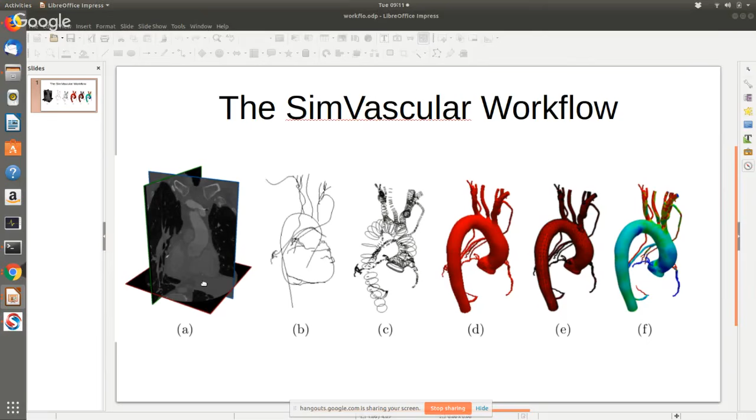And then once you have this mesh, you can then run the simulations within SimVascular, and then you can analyze the results and get any output data that you want from the simulation. All right, so generally speaking, whenever you use SimVascular, it's going to be this process, right? The blood vessel center lines, to the 2D segmentation step to create the surface, to the 3D model, to the mesh, to the simulation. All right. Okay, so just remember that when we go through SimVascular.

Okay. So here's the SimVascular software. This is the main screen you'll see when you first launch SimVascular. It's sort of the home screen. And it doesn't show anything yet because we still need to load in data, right? And so the way that works is we click File, we create a project to organize our data. And so we'll just call this webinar demo, right?

Okay. And so once we've created the new project, you'll see that the left menu populates with a number of categories. And this is the area where all the data that you create and all the files that you create while working with SimVascular will be organized so that you can go through and inspect them when you need to. Okay, so as I mentioned, the first step with any SimVascular project is, of course, we want to load in the patient's image data so that we can see what we're working with.

And so the way that works is we go to the SimVascular Data Manager menu, we right-click on Images, and we choose Add or Replace an Image. And then it will open up a file browser, so you can browse to the area where you have your image. So I'll do that here. So here I have the sample data that we have on the SimVascular website. You can choose whether you actually want to copy the file. Sometimes images are large, so you may not want to copy it, but sometimes you want to keep it organized and copy it into the project.

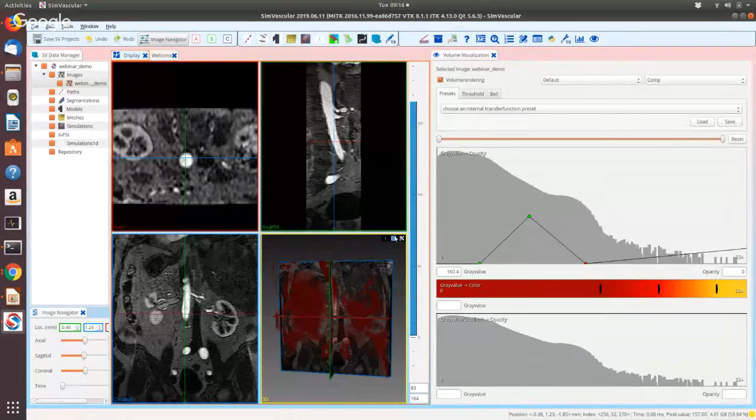Right. And so using this we can see more of what the 3D structure is, and of course we can refine this to get a better idea, right? So see, refining it a bit, we get a better idea. And if we click here, we can turn off the panels, so we can really see, actually in 3D, what does it look like? So here we get a pretty good view of the blood vessels and the kidneys, and we can see what those look like.

All right, so the volume rendering is a bit compute intensive, so I'm going to turn that off as we continue. Turn the crosshair back on, and go back to the 4-panel view. Great. So as I mentioned at the first part, the next step we want to do to make the cardiovascular or the patient-specific model is to start constructing the vessel path lines. All right. So to do that, we move to the left here to the data manager. We right-click on paths, and we choose Create Path.

You can give the path a name, and so usually you would name it for the vessel that you want to do. So in this case, we're going to first construct the aorta, so I'll call it aorta, and click OK. And now we'll see that that path has been populated in the data manager. So if you double-click on it, the path planning menu opens up, and there's nothing there yet because now we need to start adding path points. And so the way to add path points is to navigate to the image views and to control-click the areas that you want to add a path point.

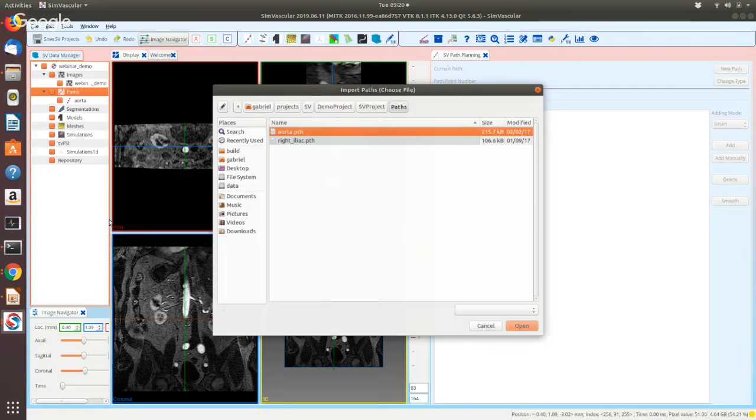But in the interest of time, I'm just going to import some pre-made paths that I have already so that we can go to the next step, which is the segmentation step. So I'll just import the paths. Okay, so as you can see, I imported the paths, and now they are populated in the render window.

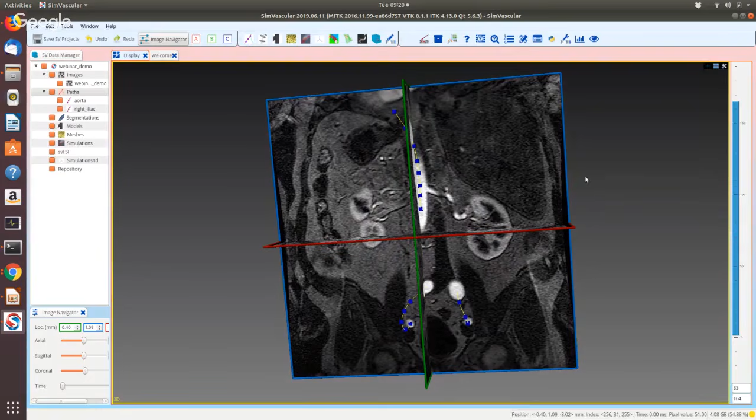Okay, great. So once you have the paths, the next step is to construct the vessel surface. And so the way that works is that we create a segmentation group. To do that, we right-click on segmentations, we choose create contour group, we give it a group name. As I mentioned, every contour group corresponds to a specific vessel path. And so you have to select which one you want to segment.

So here we'll do the aorta. And if you leave the name blank, it will just give it the same name as the path, which is fine in this case. So we get a segmentation now that says aorta. Great. So we can double click on the aorta to open up the segmentation menu.

And as you'll notice, now the view has changed because now we have entered into the segmentation view, which is something that was specifically built for SimVascular to make this process easier for people doing these segmentations. So essentially what you see in this view is we have a planar view of the cross-section of the vessel corresponding to a plane that's perpendicular to the current vessel path line, right? Because this really lets us see what is the cross-section of the blood vessel at this particular path point. And so this is what's shown here.

So you can really see the surface of the blood vessel and what its shape is. And then in this view, we have a gradient image to additionally help you identify where the boundaries of the vessel are, because those are usually high gradient sections. So in the segmentation menu, you can drag this slider to slide across the vessel, right? And doing this, you can see how the vessel evolves as you move down the path line.

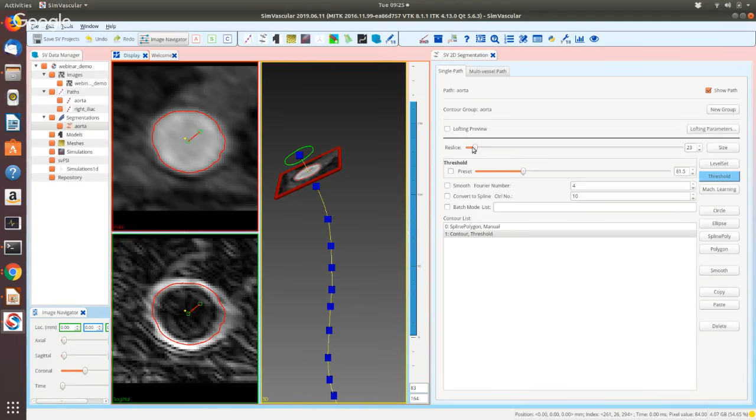Additionally, let me actually explain a few more of the individual segmentation steps. So we have more methods, things like you can draw a circle or an ellipse. And in fact, one of the most recently added aspects is machine learning. So if we click the machine learning, it'll activate it for you, which takes a moment as it needs to load the machine learning models, which you can view the progress by looking in the console window to see what it's doing.

And once it's done loading those models, you can then use the machine learning to compute segmentations automatically without sort of manual interaction. So this can be good if you have to do a lot of segmentations and you don't want to get fatigued. All right, so I think it's ready. So now that we clicked it once, it's activated.

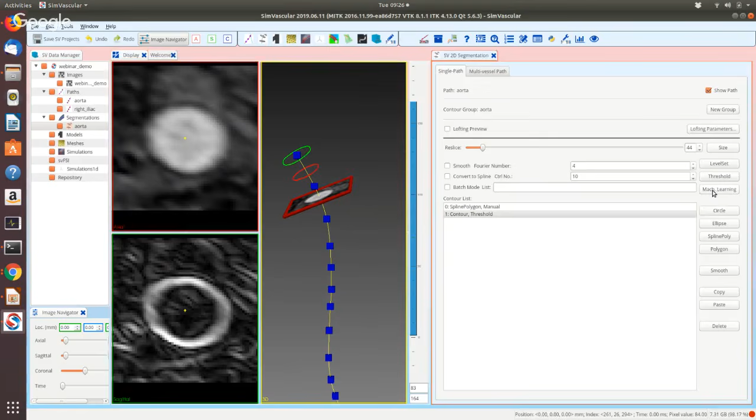So we can click it again, and you see without any interaction from us, it was able to compute the segmentation using a neural network. So if we wanted to do more, we could do more of those. We just move along and we click the areas where we want to compute more segmentations.

Okay, so computing segmentations individually is great if you want to have full control over the geometry. What you can also do is use batch mode, which lets you do multiple locations at the same time. So if you click batch mode in this area, you can enter the locations where you want to do more segmentations. So for example, I could do 150, 180, 210, 220, and say 250.

And then if I click on the corresponding segmentation method, it will go through and do those locations for me. So you see here, I got the segmentations for the method I was using. And so I can go through and see what they look like to make sure that they're okay. So the batch mode is definitely useful if you want to do lots of segmentations for a particular vessel.

And in particular, recently added, you can even do segmentations now for multiple paths at the same time, and this will use the machine learning method to do that for you. So in the segmentation window, if you click multi-vessel path, you can select the paths you want to segment. So we can select here the aorta and the right iliac. We indicate the frequency along the paths that we want to do segmentations.

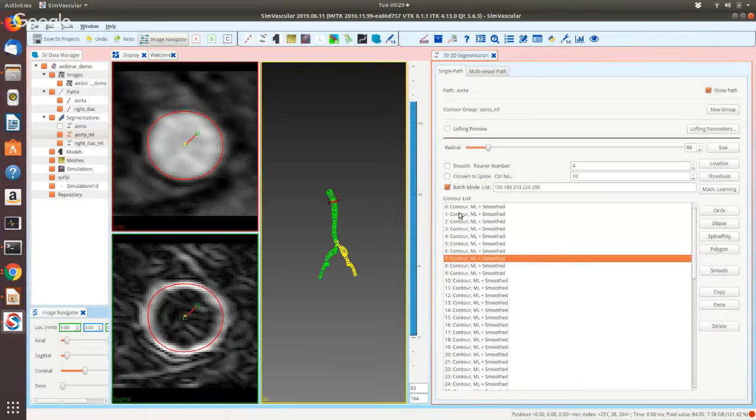And so we can actually double click on one of them to inspect them. You can click in the contour list and you can walk through to make sure that if there were any that need to be more accurate, that you can go through and improve those or change those. Okay, so that's more or less how the segmentation works, right? So you would do this for every vessel that you want to have in your model.

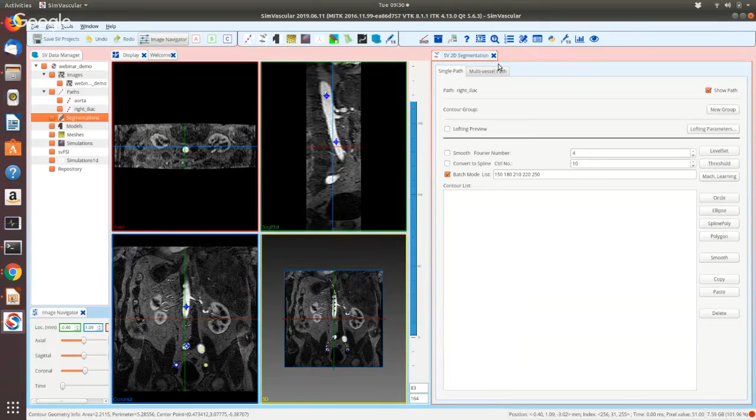Again, in the interest of time, I'll load some pre-made segmentations that I had, so that we can move on to the next step, which is to create the 3D model for our patient-specific simulation. Oh, so here I have the segmentations that I created earlier.

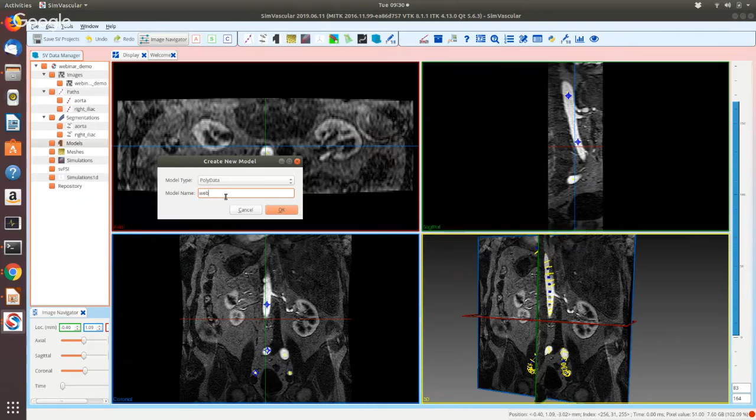All right, so for the 3D modeling step, we now take our segmentations and turn those into a 3D surface, a unified 3D surface. So to do that, we right-click on models, we choose Create Model, give it a name. Again, let's call it Webinar Model or something. Okay, we then double-click on it, and the modeling menu will open up for us. So this menu gives us the options to create models and then to refine them after we've created them.

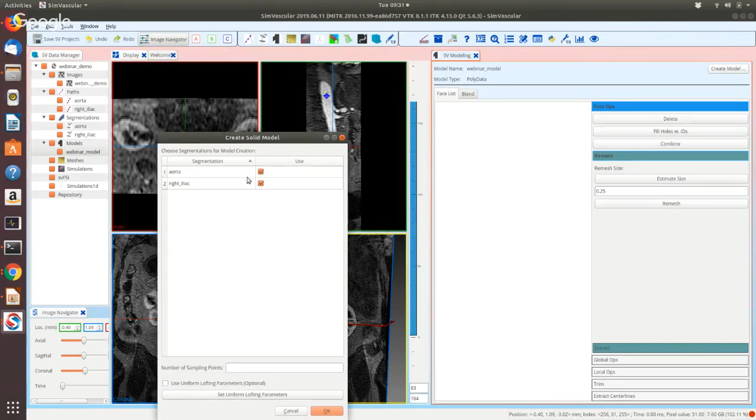So we can click the button here, Create Model. This will allow us to select the segmentation groups we want to use. So in this case, I'll select the two that I used. But if I had many paths or many vessels, I could select different subsets depending on what I wanted to study. But in this case, I only have two, so I'll just use those two. And then we click OK. And SimVascular will start combining those together and creating the 3D surface.

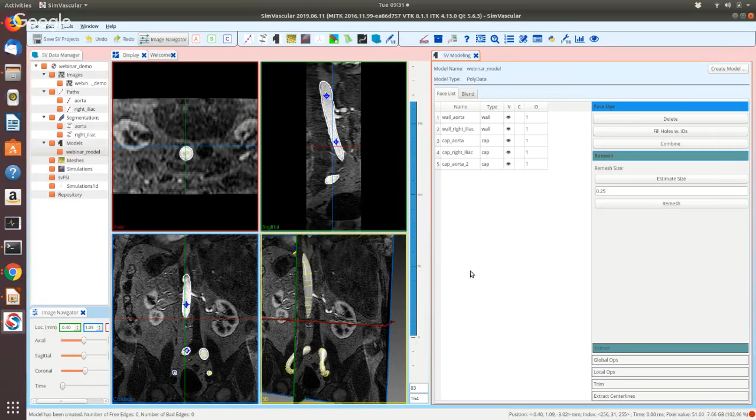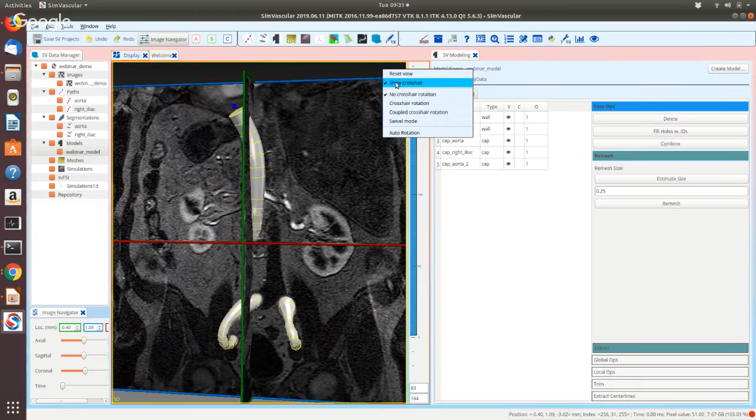So if I open the 3D view a bit more, we can see the 3D model. I'll turn off the slices. Great. Turn off the segmentation as well. Okay, so here we see the 3D model that was created from our vessels. And so as you can see, it's all been combined into one model.

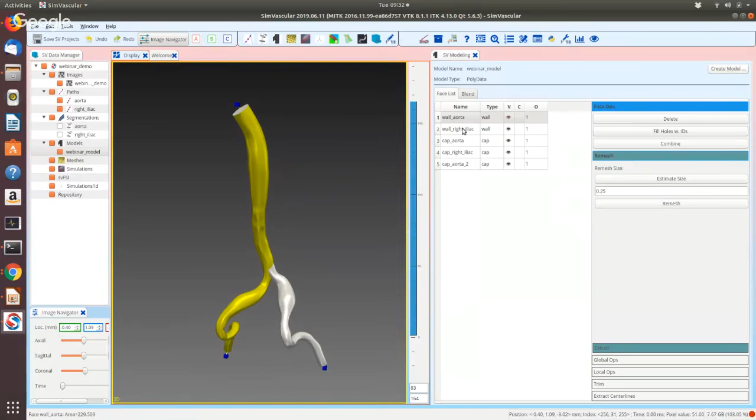Additionally, SimVascular will also compute what aspects of the model are a wall, so for example, here, and what aspects of the model are a cap, which is needed for the boundary conditions, right? And so these are all merged together, and these can then be used to create the mesh later. In particular, we can now smooth any areas of the model that still need to be refined, or we can repair any aspects that didn't come out the way we wanted.

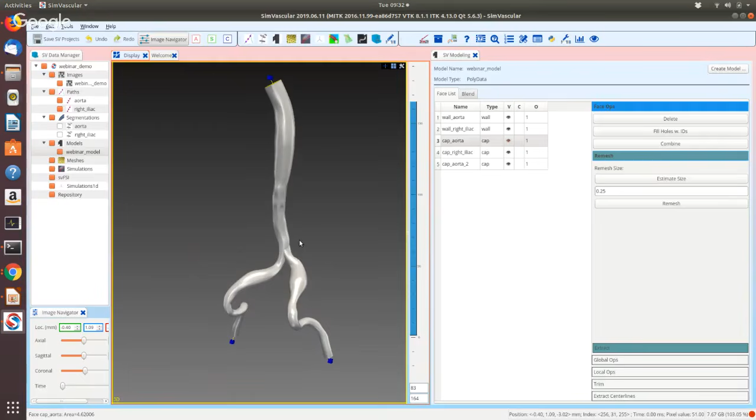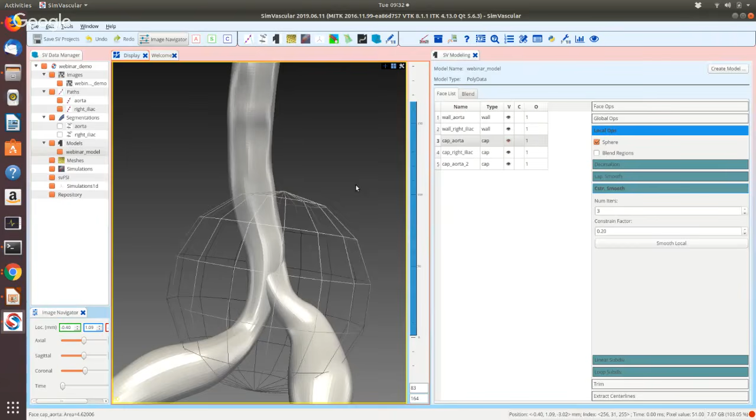So for example, usually at vessel junctions, as you can see here, the model can be a little bit unsmooth. And so what we can do is we can use some local smoothing to make that better. So if we go to local ops, we can go to constrained smoothing, which will smooth the model while preserving the volume. We can click sphere to indicate the region of interest, right? So we can move that to the vessel junction, and then we can click smoothing. We can choose the number of iterations we want to run, for example, and then we click smoothing.

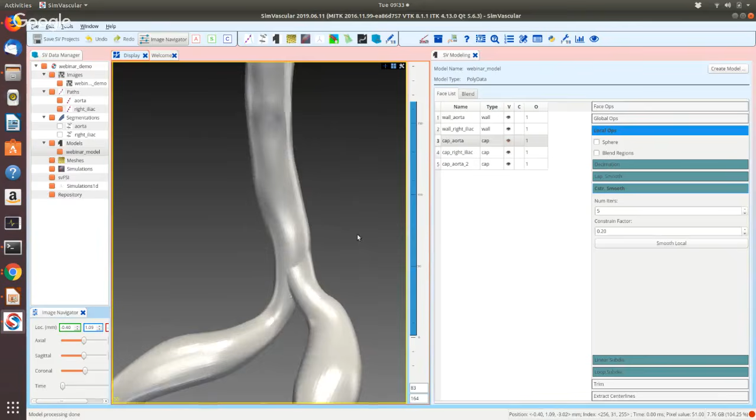And so as you can see, it now looks a little bit better, all right? So especially for avoiding things like numerical artifacts, it's good to make sure to inspect some of these regions and make sure that we smooth things properly. Okay, and so there are other operations you can do, such as global smoothing. But again, in the interest of time, I will just preload a different 3D model that I had generated already.

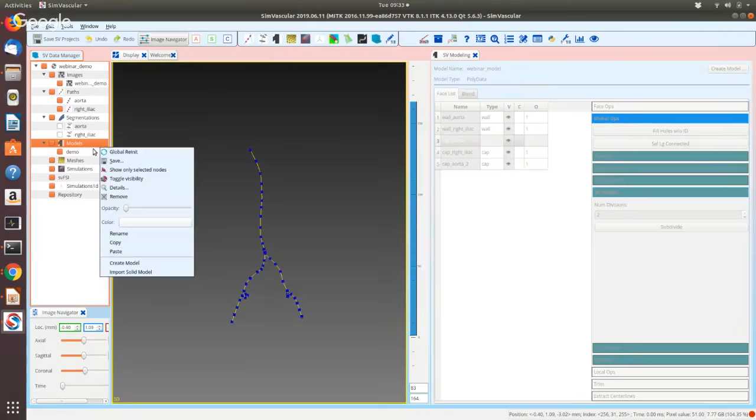Okay, so here's my 3D model. Looks almost the same as the one we just had. Great. So now once we have the 3D model, we can create a numerical mesh for our simulations. And so to do that, we right-click on meshes and choose Create Mesh.

You can choose the 3D model that you want to use for the mesh. In this case, we only have one. And if you leave the name blank, it will just use the same name as the model. So that's fine in this case. And so now we end up with our demo mesh here.

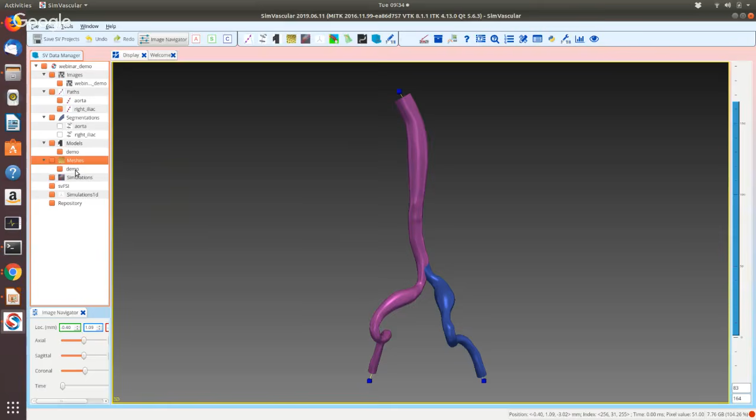So we can left-click on that to open up the mesh menu. And this will give us the options to create the mesh we want to use. So in particular for the mesh, one of the things we need to do is indicate what element size we want to use. And so we can either enter that ourselves, or we can let SimVascular estimate it for us. And there are some advanced options, but I'll mostly cover the basics right now.

So for example, if I click Estimate, SimVascular will estimate a mesh size that I need to make sure that the mesh has a decent quality. And so in that case, that's about 0.2. And so if I click Run Mesher now, it will create the mesh for the model. And so depending on how many elements you have, what your mesh size is and how big your model is, that can take a while. But I think here it should finish relatively quickly.

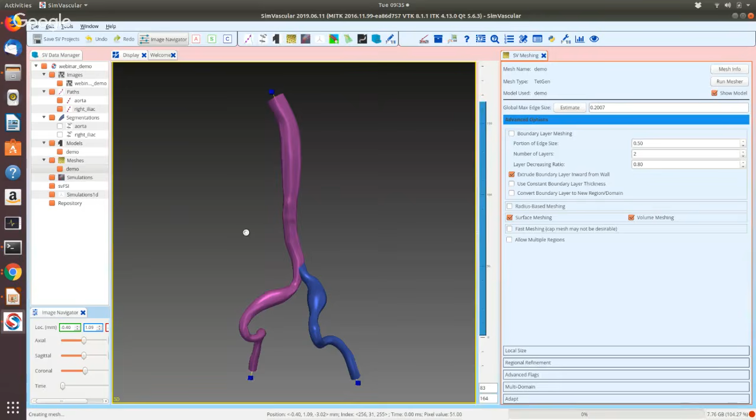Yeah, so we just have to wait for it to finish. And once it's finished, it'll give you the mesh statistics, such as the number of nodes, the number of elements, the number of edges, and the number of faces. And so you can use that to get an idea of what kind of numerical simulation you're about to run. And yeah, so this is the mesh.

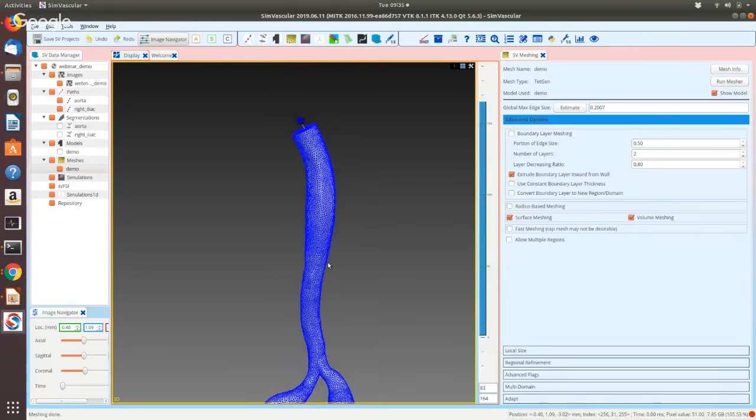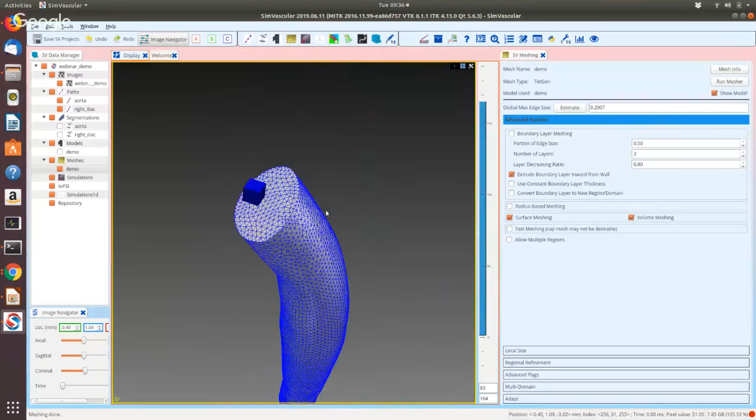And if I turn off the model, I can move in and inspect it, so I can see what the elements look like, and go in and make sure that they're all okay. So I can look at the area that we just smoothed, and make sure that that came out fine, that there's no bad elements anywhere, which is useful to make sure that you have good quality simulations at the end. We can also look at the caps and make sure that those are also okay. So yeah, this looks like it came out well.

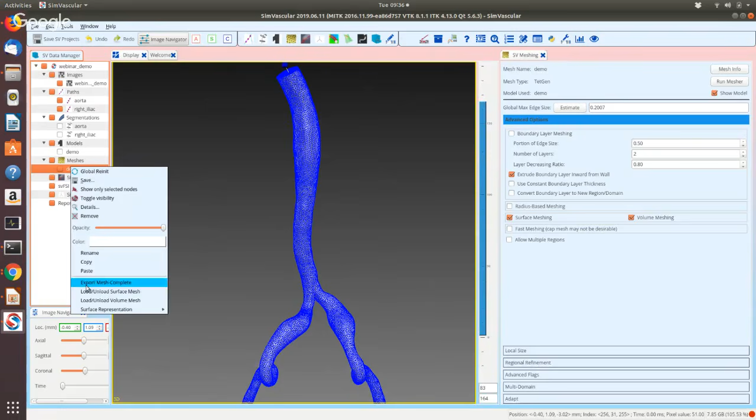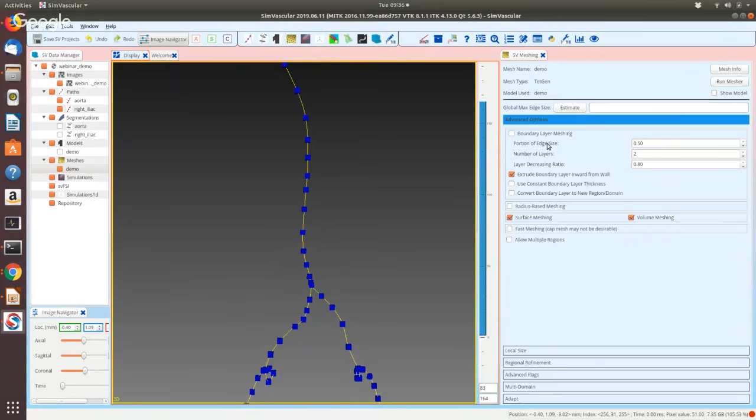Okay, so now that we have our mesh, we can conduct a simulation, which is the final aspect that we're sort of interested in. So again, in the interest of time, I made a coarser mesh just so that we don't have to wait a long time for the simulation to run. So I'll just import that. Or actually, I'll just create a mesh with a larger element size. Okay, so here we have a coarser mesh, so that we won't have to wait so long, because I am just running this on my laptop right now.

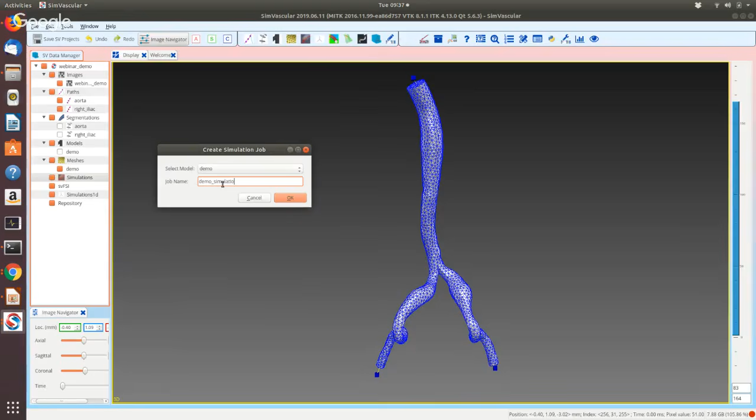Okay, so now we can right-click on the simulation menu, choose Add Simulation, and then we can enter a name for the simulation here. So we can just call it Demo Simulation. All right, and then if we double-click on it, the simulation menu will open up. So the first tab you see is for the basic parameters of these simulations, such as the fluid density and the fluid viscosity. So those have been preset to typical values for blood flow simulations. But if you wanted to run different types of simulations, you could edit those here.

The next thing we can do is specify the inlet and the outlet boundary conditions. So usually those are things like either we specify a velocity, or we can specify things like a resistance boundary condition or other types of boundary conditions. And so what we'll do here is we'll specify an inlet boundary condition of the velocity at the top of the aorta, and then we'll specify resistance boundary conditions at the bottom, so that we can calculate the flow in that scenario. So the way to do that is you double click on it, you choose the type of boundary condition you want, then you right click and you choose Set Boundary Conditions.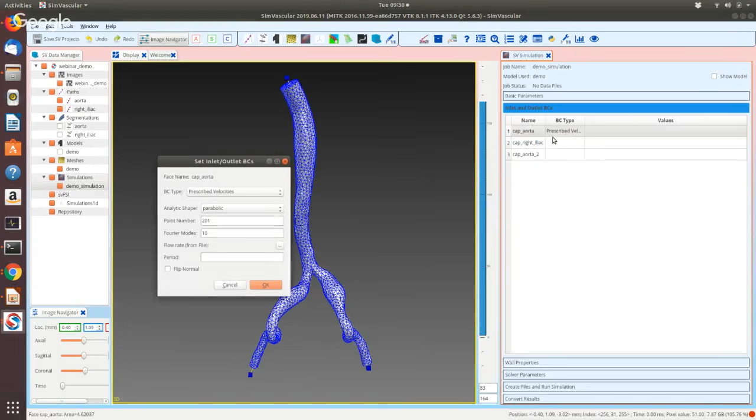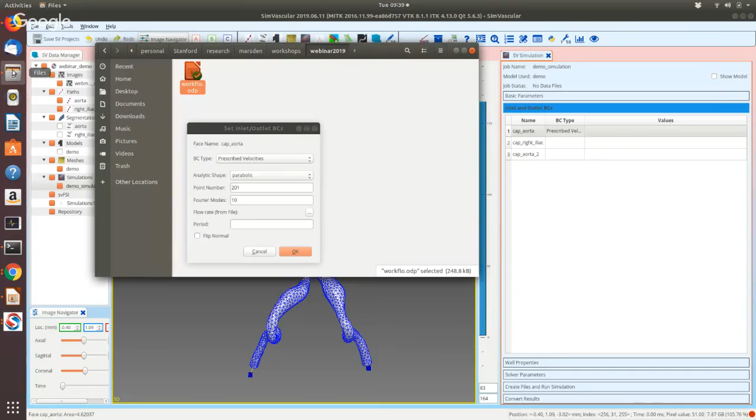So for prescribed velocity boundary conditions, we can prescribe the shape of the velocity profile, and then also how it changes over the course of the simulation. And the way we do that is we can specify the number of points to use in the profile estimation, and then we can use a flow file to indicate the flow over the entire simulation. And so what that looks like, if I browse to the simulation directory, I can show you what one of those files looks like.

And how to create these files is explained in the tutorials on the SimVascular website. And so here, I just have a simple flow file which specifies the flow at the start and at the end. And I've specified those to be -100. So -100 indicates that the flow is moving down. And so this essentially is just indicating a constant flow over the entire simulation.

But there's definitely the possibility to specify different types of flows. And so you can look at the website to see how to do that exactly. I'll also just use one Fourier mode, use 2 points, and select the flow file that I have. All right, and then click OK. Great. So now we have our prescribed velocity boundary conditions set.

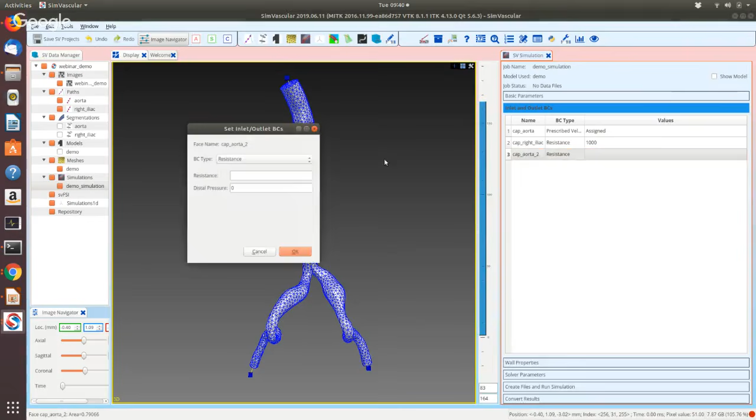We can now prescribe the resistance. So I double click again, I choose resistance, and then I right click and choose set BC. So you can choose resistance value. So let's just say something like 1,000. And these are just the typical units. Okay. So here we have our boundary conditions, and now we can move on to the rest of the simulation.

So within blood flow simulations, you can choose between, do you want to keep the walls rigid or do you want them to be deformable, and what kind of deformability you want. So those are also available within SimVascular. So here we'll just choose rigid since it's the simplest. And then we can move on to the solver parameters.

And so here you can choose things like the number of time steps, the time step size, some other more advanced parameters like we have backflow stabilization to ensure that the simulation doesn't diverge due to too much backflow. And then there are some nonlinear solver parameters as well as linear ones.

And so these are advanced, and you can read more about how to set those on the SimVascular website. Typically, they're set to work well for most simulations. So if you're just getting started, you probably don't need to edit these, but the information is there if you wanted. So here we'll just set the number of time steps, and in this case, I'll just use a relatively small number just so that we can see what it's like.

I use time step size, let's say 0.1, and so you need to make sure that your time step size is sufficiently small for the stability of your simulation. And then we can set the number of time steps between restarts, which is a parameter used by the solver to make sure that the accuracy stays okay. And so we can just set that to something like, say, 5. Okay.

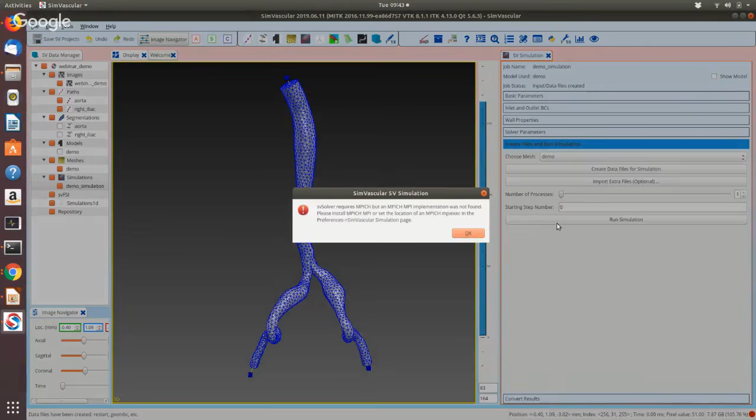Okay, yeah, so if you don't have MPI installed and you choose Use MPI, it'll give you an error. So you may need to turn that off. But okay, so I just ran the simulation and it finished. And so we can inspect the details to make sure that everything was okay. All right, it'll tell you things like the number of iterations it used, things about the residual, etc. So you can inspect that to make sure that it's doing what you wanted it to.

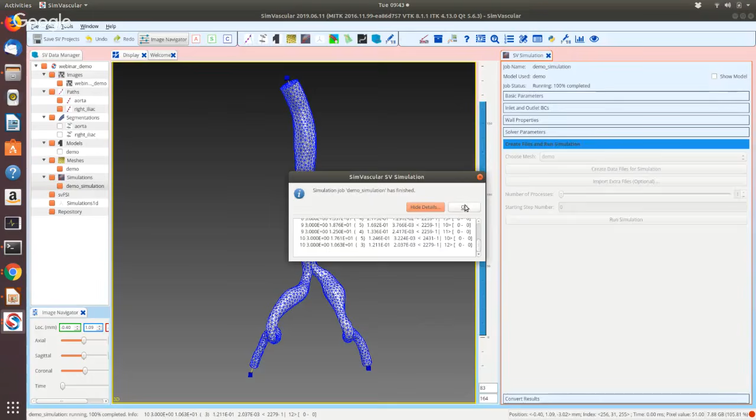Okay. And so once we're done running our simulation, what you can do is export the simulation files to a particular directory. So I can browse to the location of my SimVascular project file. And I can just select the demo simulation, that's fine. We can choose the steps to export. So we did 10 time steps. So I'll just choose to do that and export every step.

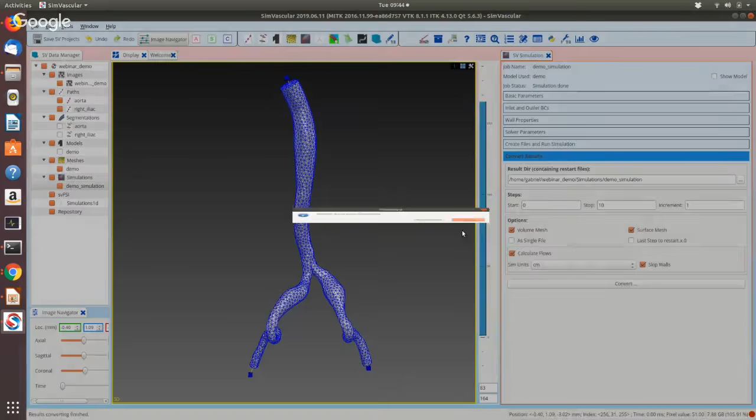We can choose what we want to export, and you can choose the simulation units. All right, so we click Convert, and then we click Open, and SimVascular will convert the simulation files for us. All right, so now we have successfully completed our simulation. The output files are stored in VTK accessible formats.

So it'll store them as a polydata or an unstructured mesh, and so you can read those with any program that can read those. We typically use ParaView, which is also a free and open source software. So if you wanted to use that, you could use it too. So I will just show you what that looks like.

And in particular, these files will show us the results of the simulation and the output quantities. Okay, so ParaView is open. I can now navigate to the location of the simulation that I saved.

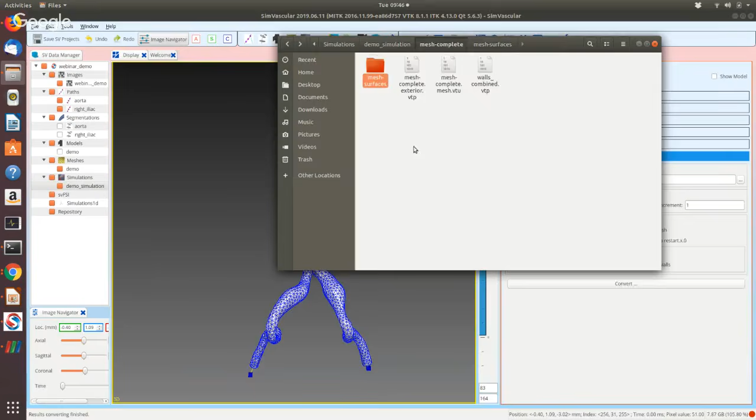And this will be in the... it should be. Let me see, where did I export it to? Okay, well, it seems like maybe I exported it to a different location, so let me look for a second. Okay, so here it is.

Yeah, so once we exported, we should have a folder that says converted results. So we open that, and here are the results. And so you can open the one that you want to. So let's open the one for the final time step, and then we can view it.

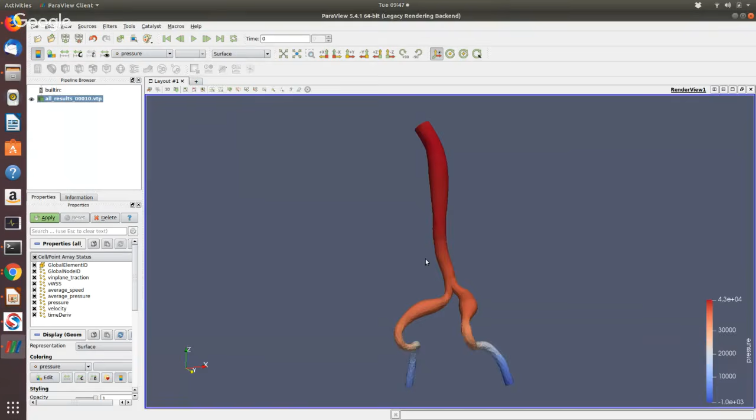And so here we see the pressure in the vessel during our simulation. So, as you expect, since we started with a prescribed velocity, we have a high pressure at the top and a low pressure at the bottom, indicating that the flow moves to the bottom. And we can click here to view other aspects.

So, for example, we can look at the wall shear stress, which is an important quantity in cardiovascular blood flow simulations. And this will show us the distribution of the wall shear stress across our geometry. And we can look at other things such as the traction, etc. And then this is how you would compute or investigate your blood flow simulation results.

And then you could also use this to compute other things such as streamlines, and that would let you study the blood flow for the specific patient that you did. Great. So that was, in a nutshell, or in a lightning nutshell, the workflow for SimVascular.

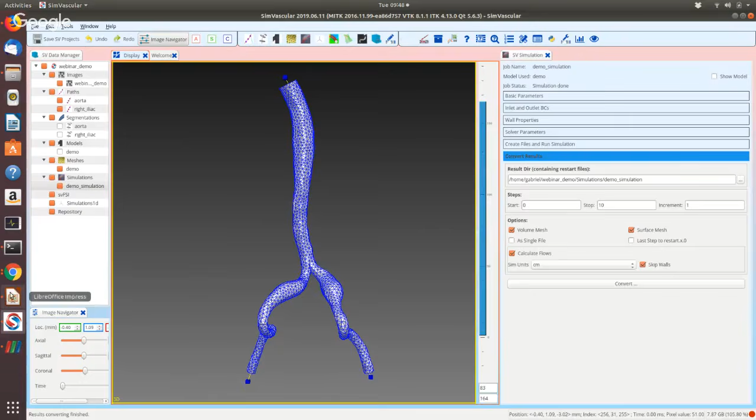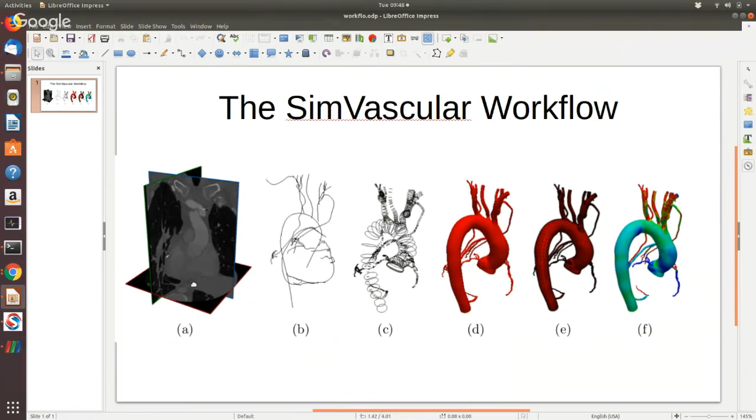So we loaded our image, created the blood vessel paths, made the segmentations, then made a 3D surface, made a mesh for it, and then using that mesh, we ran a simulation, and then we viewed our results, which, as I mentioned, is the SimVascular workflow. And so this is what SimVascular has made easier for you, and it lets you do all of that in one location. And again, all of this is explained on the SimVascular website.

There's more examples of different cases you can run through. So definitely make sure to check that out if you're interested. And if you run into issues, you can go to simtk.org and look for SimVascular. And here you can download the software and the solver, and you can also find the forum if you have any questions.